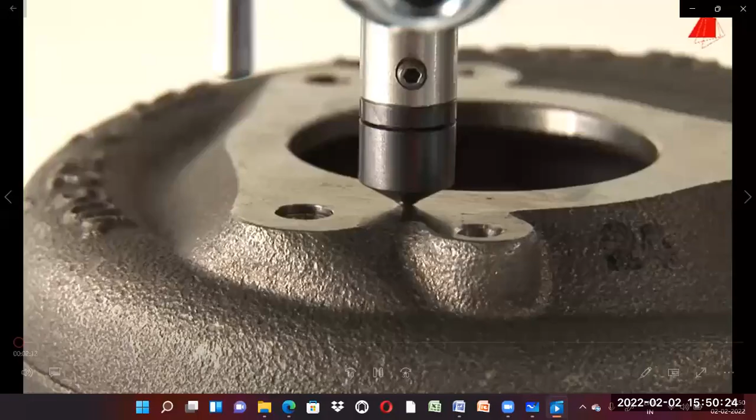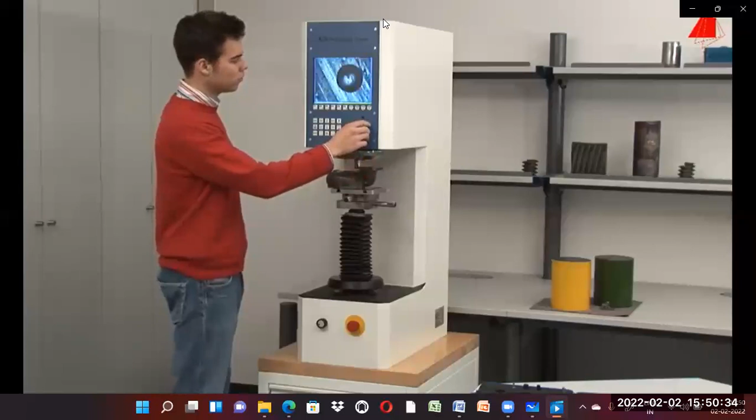After the test force, the indenter automatically lifts off again and the microscope lens pans back to its former position. The indentation can now clearly be seen on the monitor. With the control knob, the tester places 4 measuring lines on the edges of the indentation to measure its diameter.

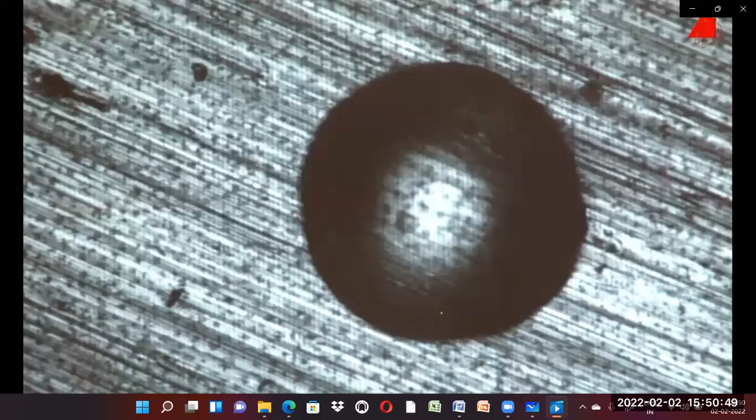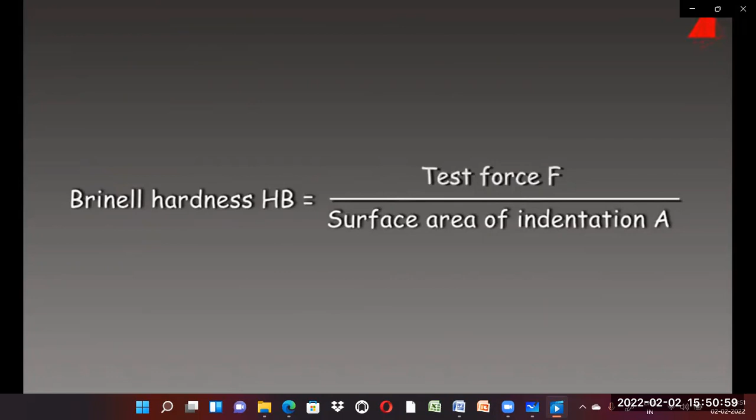That's it. The testing machine can now calculate the Brinell hardness. The hardness value is defined as test force F in the old unit kilopond divided by the area of the indentation A in square millimetres. The result is displayed on the bottom left.

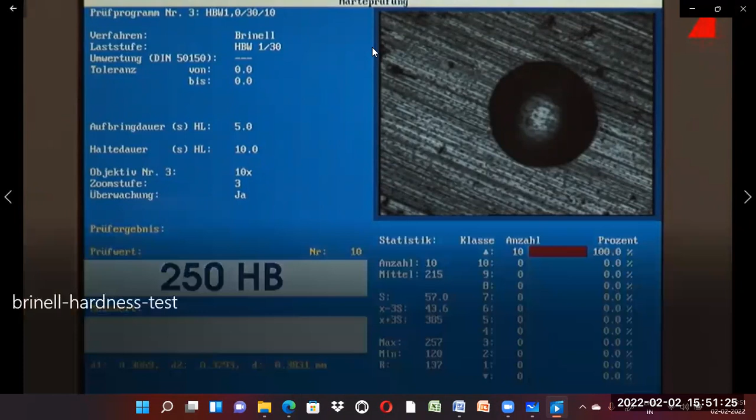There are two methods, two measures, for the materials we are going to test with the help of this: ferrous as well as non-ferrous material. Now I will choose the brass material. First I will place the brass material onto the anvil of the tester.

With the help of the hand feed, we are going to raise the specimen. Before I conduct the test, I will go and choose the load. What is the load we are applying onto the ferrous as well as non-ferrous? For the brass, we are applying a load of 1000 kg.

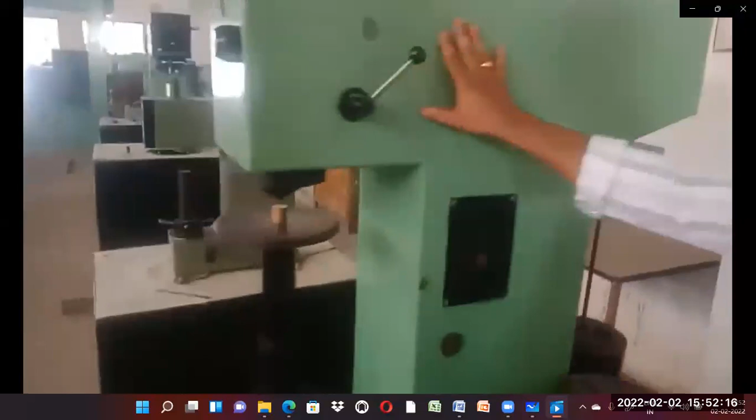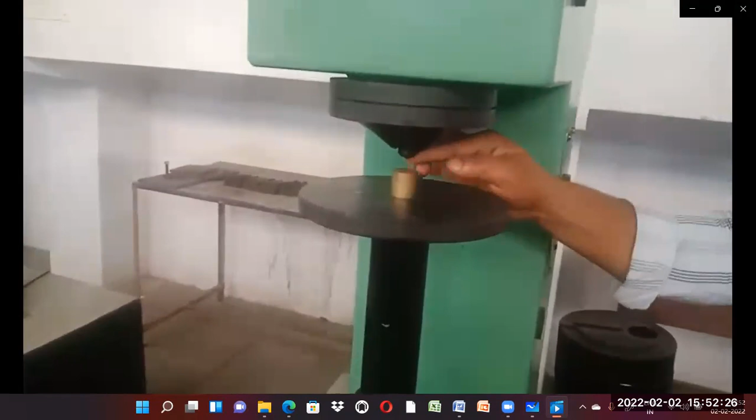This is the indenter; we are fixing the indenter knob, that is the indenter holder. The indenter we are using is a steel or carbide steel ball indenter. The diameter is 10 mm.

For different diameter balls, we use different loads. But now we are using the 10 mm ball, and the load we are applying is 1000 kg with the help of the weight pan. Then the effective load is transferred to the indenter.

Then switch on the machine. Once switched on, raise the anvil with the help of the anvil control.

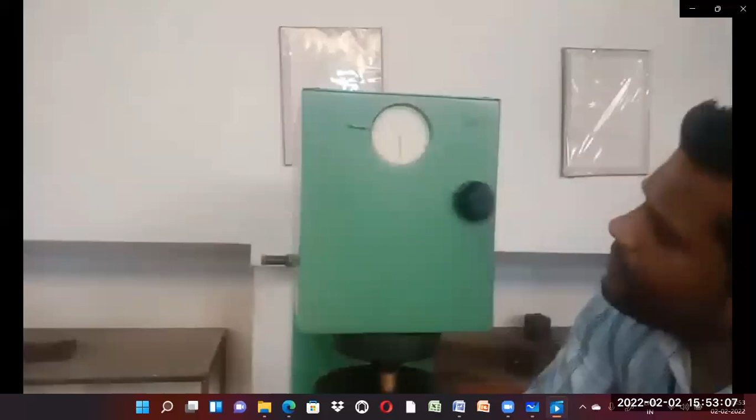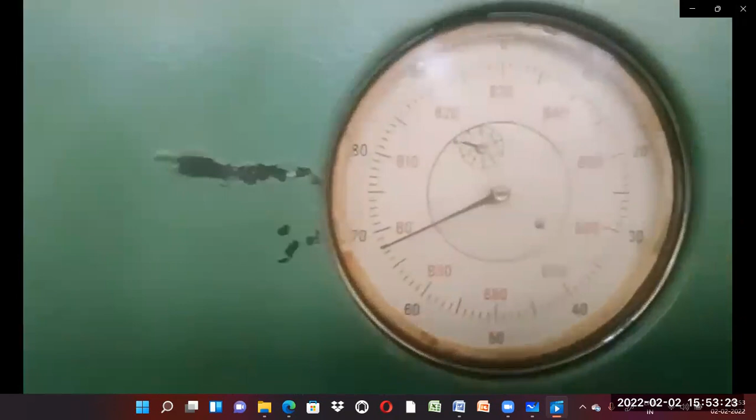Then slowly I will apply a load with the help of the load transfer lever. We give a dwell time of 5 minutes till the big indicator shows movement of the needle. Then it comes to a stagnant point, becoming stable and stopping at one particular point.

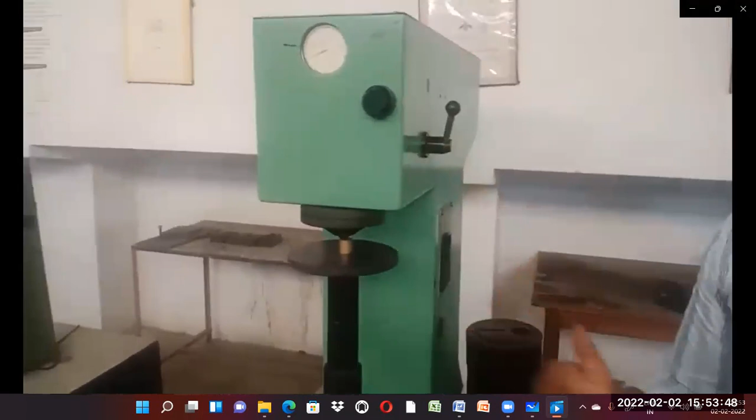Depending upon the different material, we give the dwell time until 5 minutes. After 5 to 10 minutes, it stops. Once it stops, we release the load, then take out the specimen. After 5 minutes, release the load.

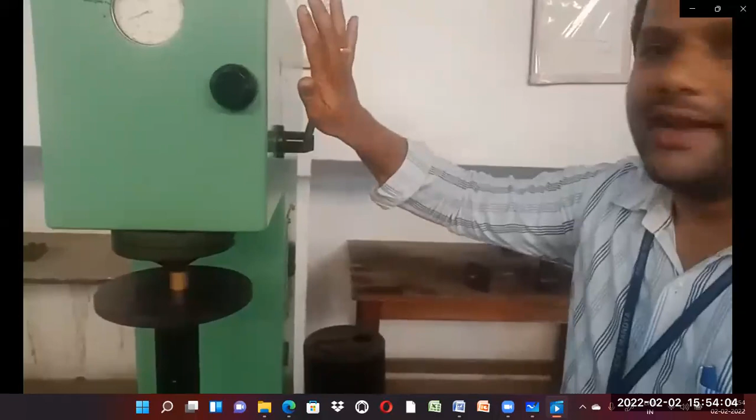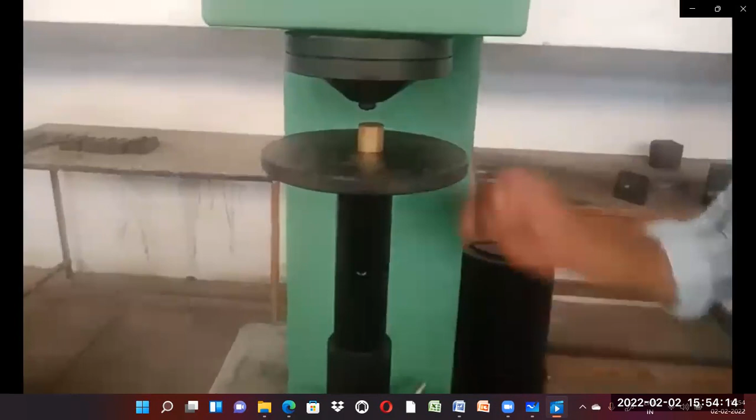Then, once again in anti-clockwise rotation, we retract back the anvil, take the specimen and switch off the machine. There should be an indentation mark appearing on the specimen. With the help of a chalk piece, we mark that one.

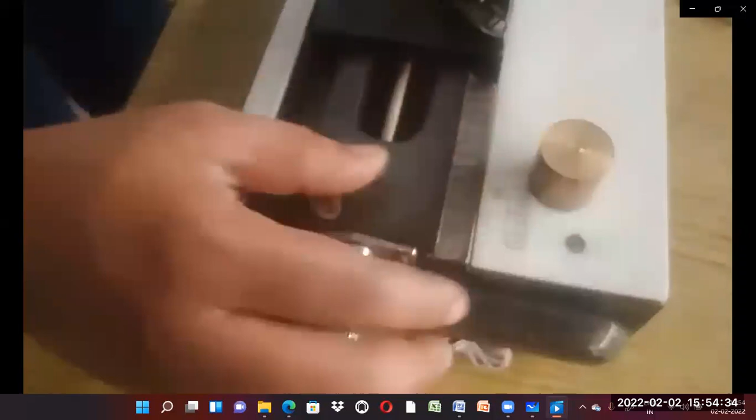Once the mark takes place on the indentation, with the help of the traveling microscope, we take out the D1 value, diagonal 1, and in the other direction diagonal 2, then take the average value of that.

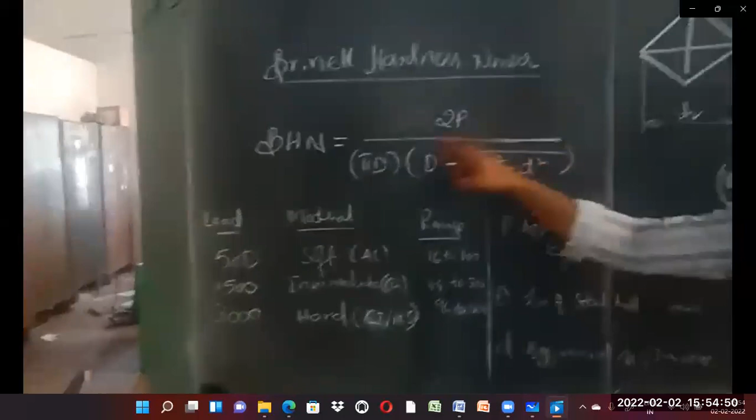Then with the help of the BHN formula, written here as 2P divided by pi D into D minus square root of D square minus small d square, we find out the BHN number.

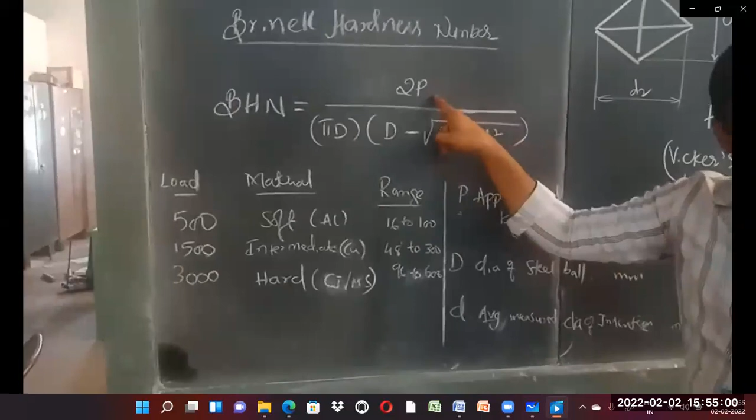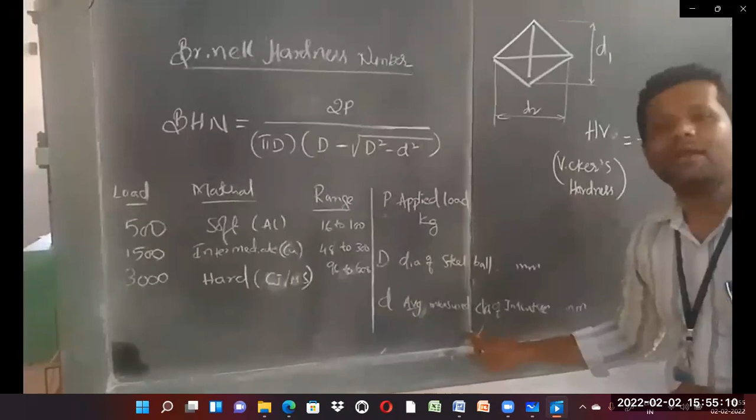Here, P is the applied load, that is for brass we are applying 1000 kg. D is the diameter of the indenter, that is 10 mm diameter steel ball indenter. Small d is the average indentation diameter appearing on the specimen, that is the indentation mark. With the help of this formula, we find out the BHN number.

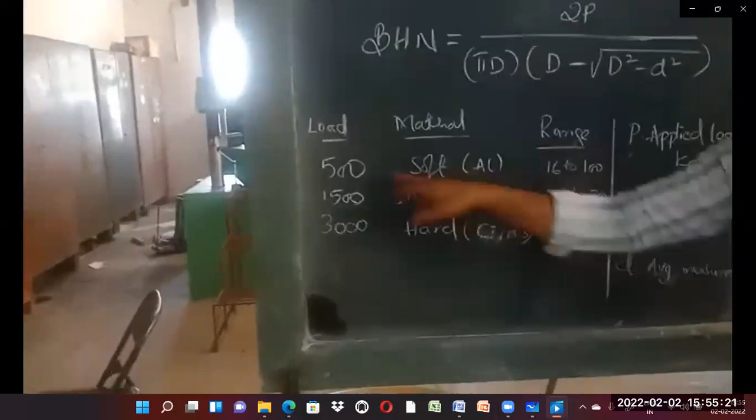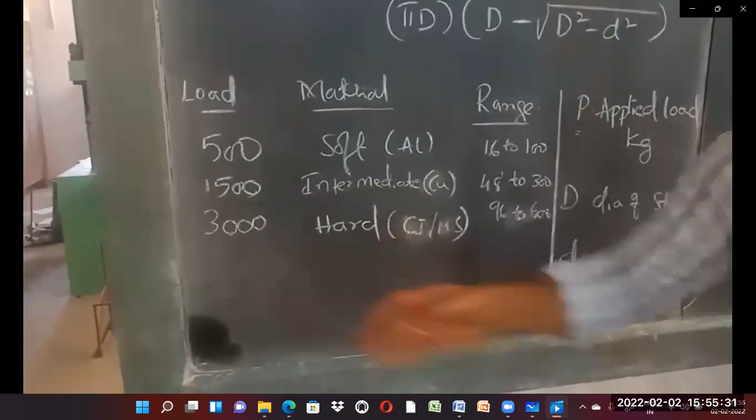For different materials, we apply different loads. For aluminum, the applied load is 500. For brass, the intermediate material, copper, brass and bronze, it's 1,000 to 1,500. And for hard material like cast iron, the applied load is 3,000. With this force, you repeat the procedure.

This is a Brinell hardness test. The aim of this experiment is to determine the Brinell hardness number of given aluminum and cast iron samples.

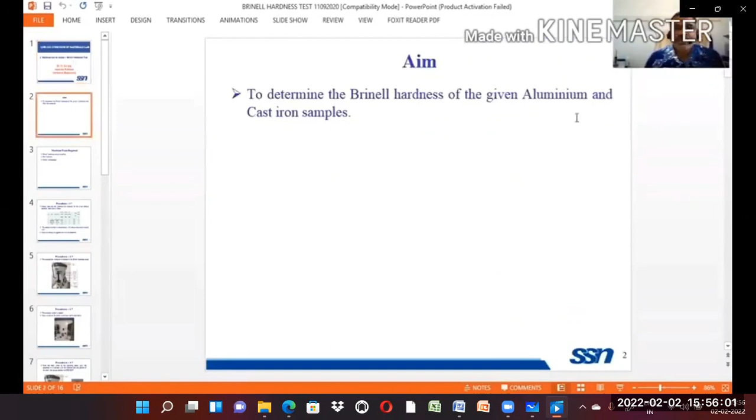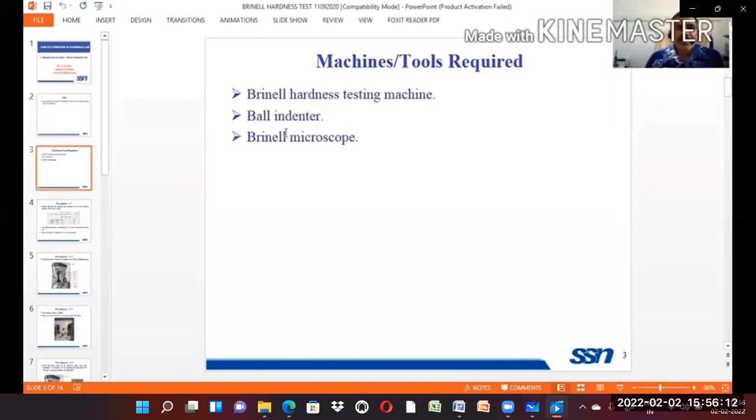The procedure has 7 steps. The first step is to fix the load and duration of application of the load.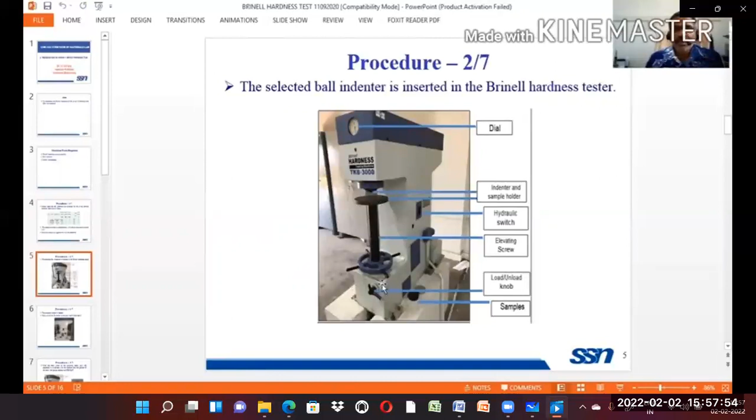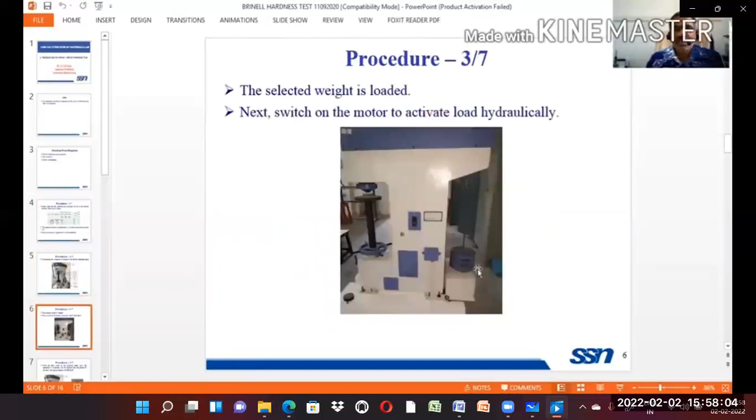Next, you have to select the weight. Already I told you how much weight is to be applied. So this is the place where you apply the load - for aluminum you apply 1000 kg, and for steel you apply 3000 kg. After that you press this button, then the load will be applied. It's a hydraulic system.

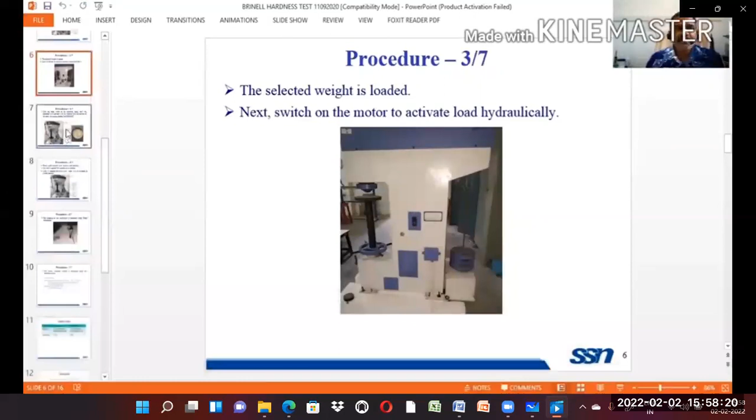This is the place where we fix the workpiece. By rotating the wheel, the screw moves upward, and the workpiece comes into contact with the indenter. Once the indenter has the initial contact, here there is a big dial.

Inside there is a small dial, and an indicator is also there. When the initial setting is over, that can be confirmed by the indicator, and the red spot has to coincide - the indicator has to reach the red spot. Then the setting is over. So now the initial setting is complete.

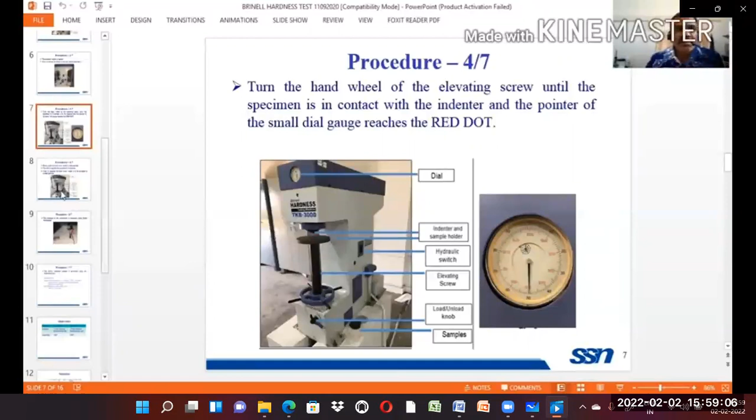After that, we have to apply the load using this loading knob. You rotate it clockwise, the load will be applied, and you wait for 15 seconds. After 15 seconds, you remove the load.

Now after the load is removed, you take the workpiece. This is a Brinell microscope. Its purpose is to measure the diameter of the indentation. After the indentation is formed, you use the microscope to find the diameter of the indentation.

We already know the diameter of the indenter - it is 10 mm. So now you find the diameter of the indentation using this microscope.

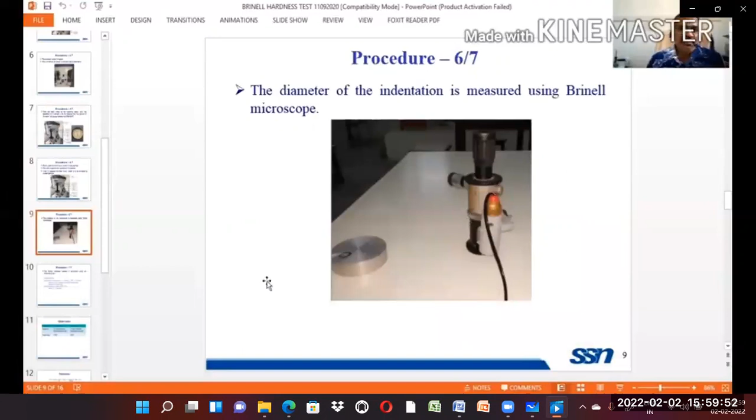After that, you do the calculation. This is the area of indentation, which can be calculated using this equation. Here, capital D is the diameter of the indenter - how much is it? 10 millimeters.

Diameter of the indentation is what you have to measure from the microscope, and you substitute all values in millimeters. Similarly, the load you substitute in kg. So Brinell hardness number is load divided by area - area you substitute from here in millimeters, load in kg. This gives you a number; it doesn't have any unit, it is just a number - the Brinell hardness number.

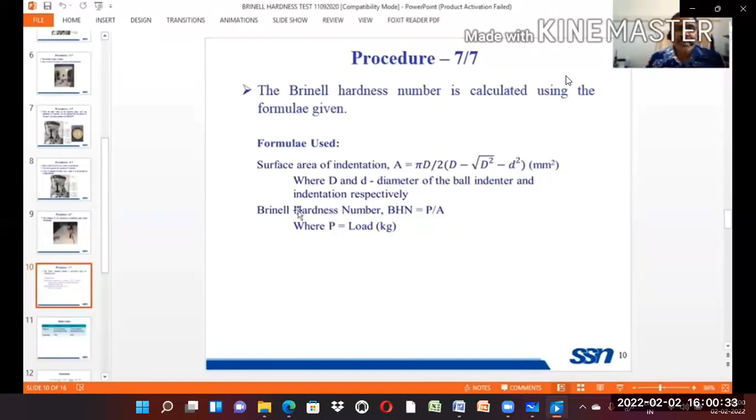So that gives the indication of hardness.